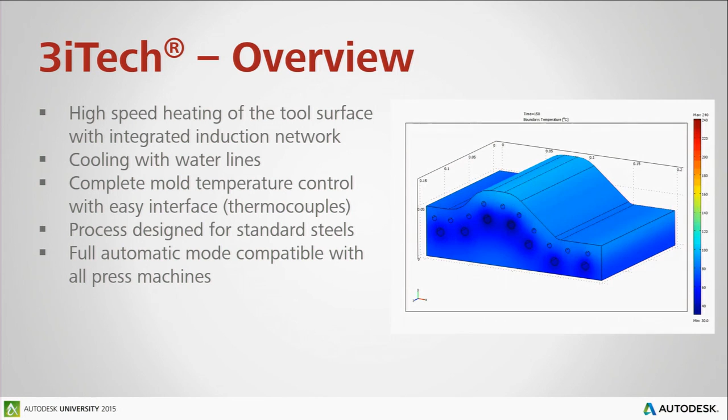If we take a closer look at what happens inside the mold, the idea is to drive a magnetic field within the channel. When that magnetic field is very well driven, very well calculated, we know exactly what's going to happen—how fast we're going to heat the surface, how well we're going to heat it, and what it will take to cool it down.

That is very important, and that's why we're spending time with Autodesk. If we can control this before making a mold, we have a very clear image of what happens in the tool before any serious investment. It's not an empirical approach where we make a tool just to find out if we can make a good part. No—we design an induction network that is relevant and proven, and then we work on the tool design with the tool maker. So we don't heat the surface of the tool directly with the magnetic field; we heat the inner portion of the channel, and then by conduction, we heat the surface.

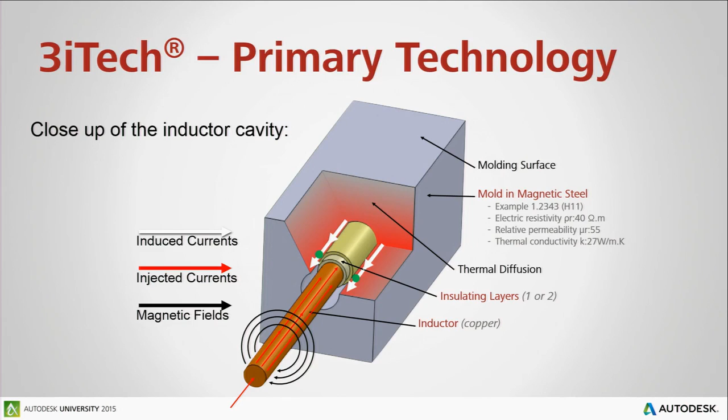I think in the last 15 years, I used to go a lot to Japan in the early 2000s. That's when everything really started, when multiple companies had the steam technologies that was rising at that time. Then I spent some time in Korea with tool makers about electrical heaters and rods and resistance, and also in Germany with pressurized water.

Remember, when you're at home, for those who have induction, you can boil water very, very quickly. Then you remove the pan, you turn it off, and you can put your hand right away on the stove. If you have an electrical resistance, you can't touch that right away, you get away a little. Same thing if you have water circulating in a pipe, you can't touch that pipe right away because there's a lot of heat transfer, a lot of conduction going on.

The other very important thing is, and I think that is why I hope Autodesk picked Roctool, is there's no temperature limitation. So the resin providers right now are very aggressive in building new recipes that cover so many different applications, even applications that used to be painted and now they're not. Sometime we will have maybe a scratch-resistant resin, and maybe that scratch-resistant resin will need 250C in the tool to get to the ultimate surface quality.

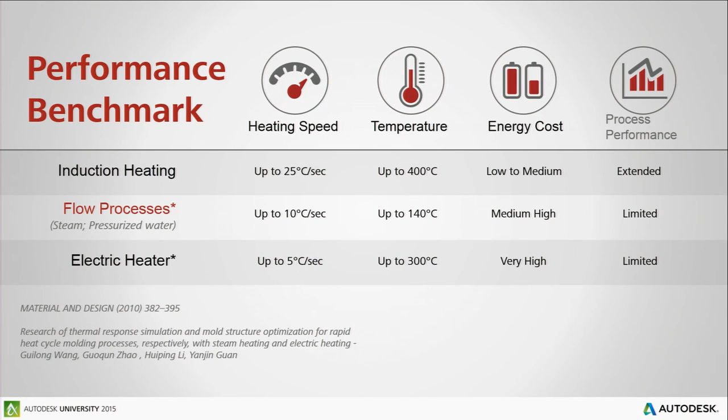That may be the most important slide before Hanno. Clearly, he has the good stuff. But the last 5 years, we've been busy. All our engineers and doctors and all the people at Roctool that make it happen, instead of spending time on the tools themselves, we spend time on the tools to make the molds.

How can we predict the heating? All the way from the heating pattern and the cooling pattern. How do we design a tool that becomes very, very fast? Because out there, a 5 seconds penalty for some companies is a very big deal. So how can we heat the mold when the press is open? As we demold parts, already we're done with the heating for the next cycle.

So all of this is done with those 3 steps where we can simulate the magnetic field based on a design. Let's say you come up with a door panel for automotive, a coffee machine, or a smartphone, we can have a quick look at what's going on. Then we apply a thermal analysis. Based on those results, we find out what's the heating pattern, is there a hot spot, or is it not heated enough here?

And we position our inductors the right way. And when we're done with that, we have a very secured image of what's going to happen in reality. And it correlates. When I was talking to a gentleman, I had no clue he was there for that trial.

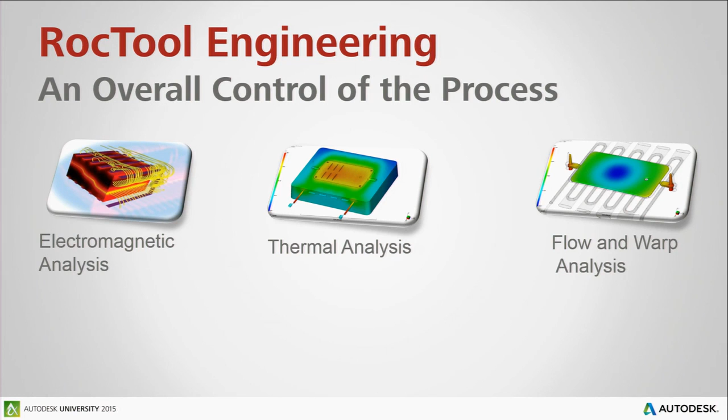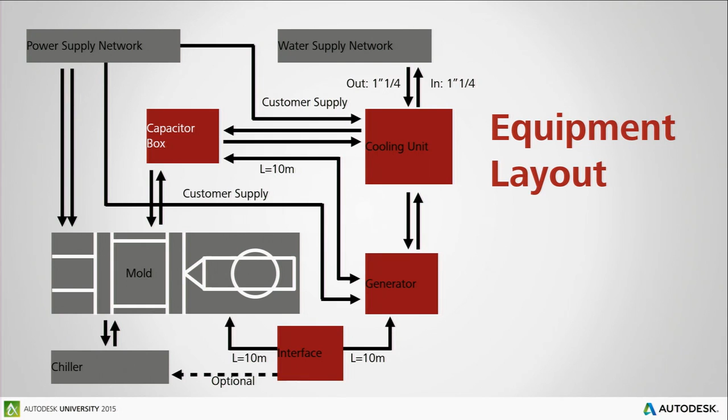Now we released the double zone generators, which is very interesting for those who have challenges with warpage. We're able to control the heat of the core and the cavity at different temperatures and also different speed. So it's one unit with two heads, and this way, for some challenging parts, you're able to balance your temperature in the tool and have different temperature controlled on the core and on the cavity. It's also a way to have, on large parts, two networks on the same cavity with not the same temperature on the same side of the tool.

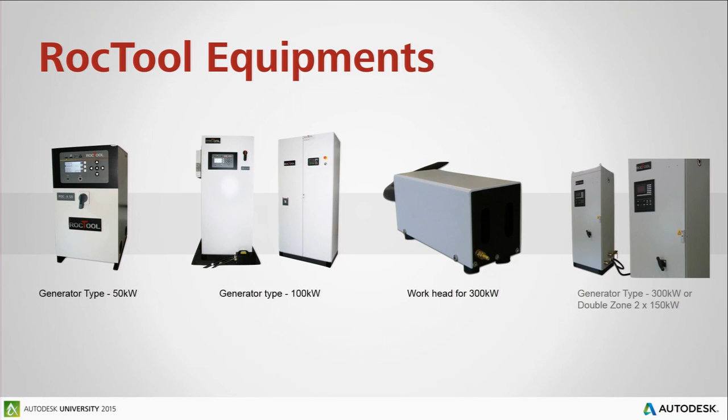So it's all about design, because again, the OEM, at the end of the day, doesn't really care that it's induction heating. I mean, if they like engineering, they may ask, oh, it's interesting, okay. What they want is new design, beautiful parts, light weighting, more performance, cost reduction. So that's our driver. So how do we make it happen?

Well, we need to work at different levels. We need to work on the material and see really, with the high heat, how can we improve the molding for that material that has been selected by the OEM? Thickness of the part, how far can we go? And that's where this collaboration with Autodesk is going to allow us to push the limits and predict more and more challenging designs.

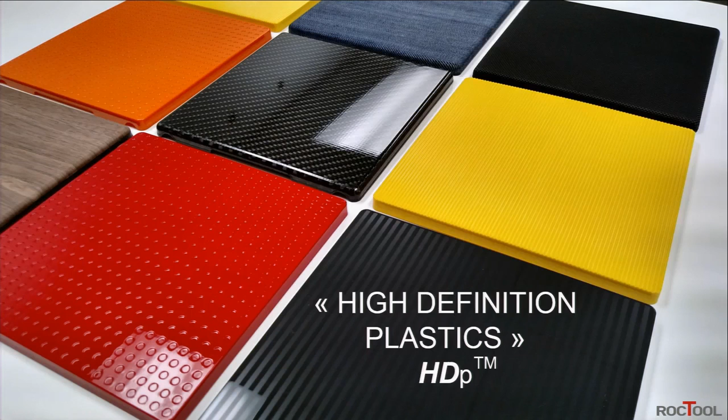So, beginning of 2016, we're releasing a very large campaign. We hired a few people for that. We really hope Autodesk will be part of that. We know they will be. What we call high-definition plastics.

The high-definition plastics is really applying what we know every day around us. When we watch TV, now we like to watch movies in HD. When we look at our smartphone, whatever we do, high definition is becoming part of our life. However, in plastic, sometimes it's okay to see a weld line for some manufacturers. It's okay to have sink marks. It's okay to accept those defects for years and years that we've been having.

Well, we say no more. So we release high-definition plastics that will gather the best materials, the best heat-cool technique from Roctool, the best software capability, so that we have something robust that we can offer to the OEM with the ultimate plastic part. That's our ambition. And beginning of 2016, stay tuned, because we will release more and more results about our achievements.

Those are the four main drivers of that HDp. Number one is to create unique aesthetic directly from the molding without secondary operation. So unique aesthetic means unique texture, high gloss, low gloss combination, patterns, anything that creates a unique part and allows the brand to differentiate itself from another brand and creating their own brand recognition.

So let's remind ourselves about some of the old advantages that we did digest already for quite a few years, but we're past that because it's so obvious. But clearly, we get rid of weld lines. Weld lines are still there, it's just that we don't see them anymore. Two flows of material getting hot in a tool, instead of getting in contact, they cross each other, the eye doesn't pick it up anymore, they become stronger and it's better looking. So we have many projects right now that are using the technology just for that advantage.

However, we think that was just the tip of the iceberg. We're now looking at more and more advantages to push the limits of plastic processing.

A lot of parts, if we look inside a car, you have trim with high gloss, low gloss, texture, metal, piano black. Each design team comes up with their own identity about what they want to show. But if each part has to be individually decorated, then cost goes up, and the designer gets frustrated because purchasing comes back and says, can't do that, that's too expensive.

Got to find a different way of doing it. So if you control the temperature in your mold, you will replicate whatever is on your tool surface. So you can create solutions where it feels like different parts, but it's just different patterns in the tool that create this effect.

If you look at this bezel right here, a very low gloss surrounding on the air vent, the inner portion low gloss, and then the ring of high gloss, it looks like there's another part snapped on as a ring, but it's not. It's just the whole part itself. That differentiation of texture creates unique design solutions.

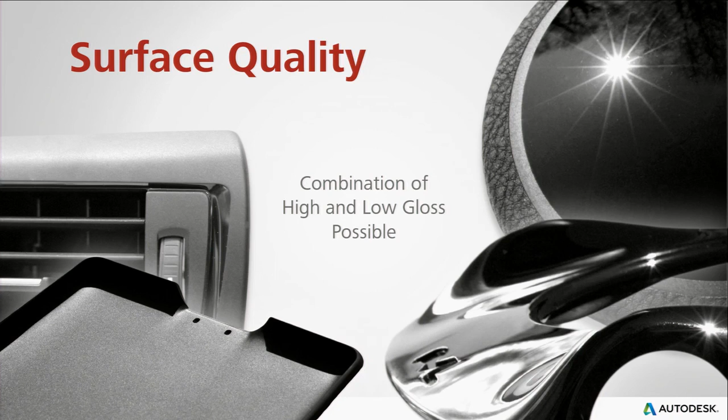The sink mark has always been a challenge, and we don't say we get rid of all sink marks, because we would be a crook. In plastic processing, we know how difficult sink marks can be. However, if you know high heat during injection, you can hold packing, and most of the time you'll be able to overcome or reduce them.

That is nice, because there's a lot of parts where sometimes we don't make the right choice about the rib ratio. Then we end up with a part, show it to our customers, and they say no, that doesn't fly. So if you have a little help at that time, high heat molding is clearly a way to overcome some of them.

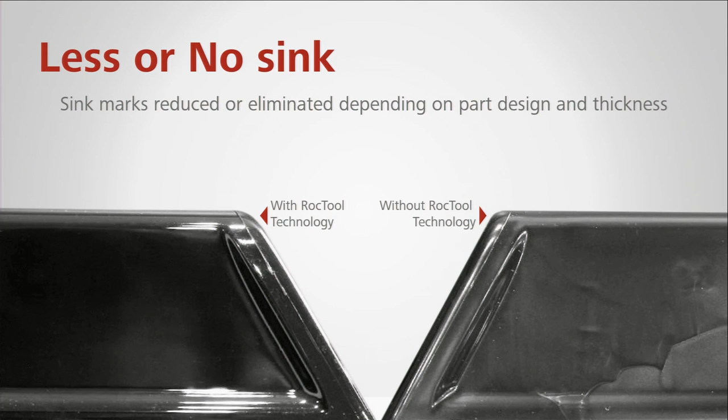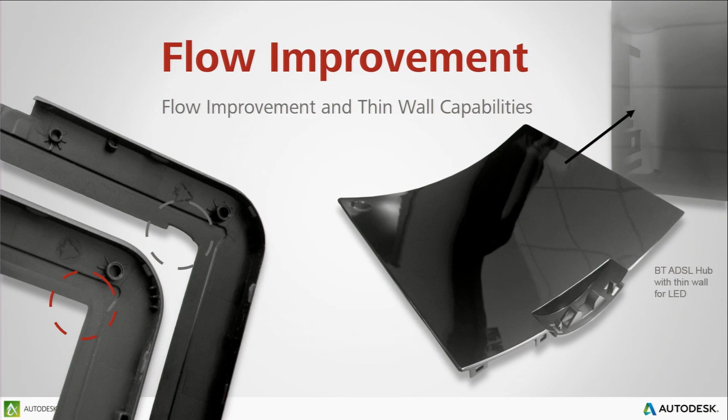It's also a flow improvement. As you understand, temperature is key to improve injection molding. We did a lot of work, for instance, with SABIC. We were able to demonstrate on key resins that from one gate conventionally, we had a flow improvement of 10 to 20% with the same material, same tool, just turning on the temperature. This is very important. As you can imagine in electronics, with those very challenging thicknesses, having this ability is a serious advantage.

This is our vision about what we call high definition, the evolution of plastic parts. We know, and we're all here because we believe in this, injection molding is number one for design functionality. In 30 seconds, you can have a part that's ready to go that can be snapped to do something, versus compression molding or others that cannot have all the back features. So we know it's a very strong process.

It's also great for productivity. It's so quick, all the way to cosmetics, electronics, automotive. If we add induction heat, we add the advantages we just talked about: top surface quality, reduction or elimination of defects, thinner wall, and also pushing the limits, reaching materials that are very viscous and very difficult to handle that now become possible.

That also opens up what we call surface-oriented resins. If we know that with induction heat we get rid of secondary operations, then the resin provider comes back in the game and says, I've got to work on solutions for scratch resistance, chemical resistance, because the part is as is—there's no more cover-up. So we do a lot of work with resin providers on color, particles, durability, chemical resistance, and also additional features like feel, cold touch. We think this is just the beginning.

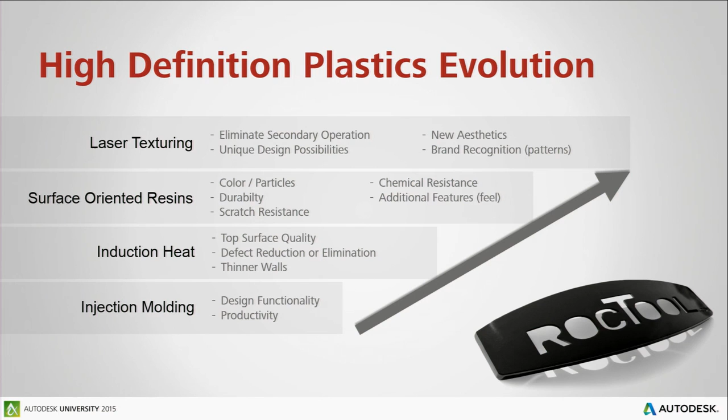This is just a quick case to demonstrate the replication on the tool surface. So if you take a Ra value on your tool texture, or VDI that we use in Europe, here it's a 22 value, and conventionally on that polycarbonate that is molded at about 180 F, the replication of the texture is about 17 on the part. So that gives you an idea.

And then this little square here is a 19 to 24, 22 to 27, from the same tool, just turning the induction on right before injection for about 3 seconds, we ramp up to 320 F. That replication ramps up to 21, as you remember was 22. But look, as you go to finer textures, 23, 24, 26 to 27, it's almost 100% replication of your tool surface. What happens is visually, the part stands out. Right away, it looks very nice, very premium. But it's the same tool, same material. There was no addition of any tricks whatsoever. It's just using the temperature.

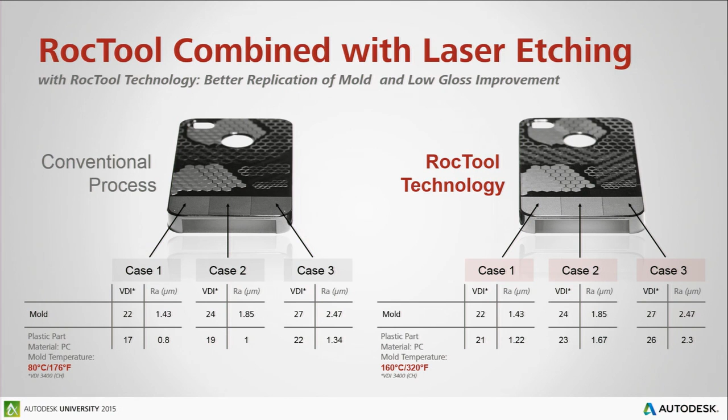I just brought a part here. I didn't bring many parts, but this one is relevant to the level of quality you can reach with laser texturing. I'll circulate it. So that's an ABS. Yes, ABS, I know it's hard to believe. The gate is right here in the middle, so we get rid of the blush. There's never a blush with induction because the material close to the gate stays warm. And this is just what's textured in the tool.

Show this? So whoever had French fries, you might want to hold the part from underneath so that the last person can see a nice part. Can I show these? Yeah.

Those are also another example of a texture. So just to explain, there's a part without. It's in French, in the back it says 'sans', so without. And we push the limits to include directly a hologram on the tool surface. Conventionally you almost don't pick them up, but when you turn on the induction, that turns them on, and you can see them like some kind of image. That's interesting for maybe some applications for protecting the application itself, making sure that it's not a direct copy from the mold. And the interesting thing I find is if you put your finger over it, you can barely feel anything. It's amazing.

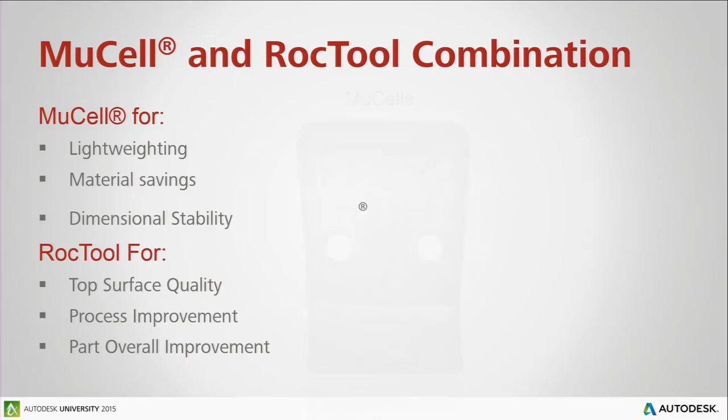So while we circulate those few samples, last but not least, I think we have a lot of work with Autodesk to continue developing this technology. And I know you already spent time on the MuCell. Yep, so that's great, there's potentially synergy here.

But whenever you mix plastic with something else, let's say you have a fiber reinforced resin, short fiber or long fiber, that can be glass or carbon, or a blowing agent or talc or any filler, during that process, when you conventionally mold, the resin and that filler are mixed up and they freeze right away, so they show on the surface. But if you're able to drive the temperature right before injection, the resin at all times, whatever the resin is, will flow much faster, will cover that charge, and have all that filler disappear from the surface.

So that part right here is conventionally molded with the MuCell, where with laser texture details, we have a high gloss zone, a big weld line in the middle, a little square of super thin wall, less than 1 millimeter here, and then low gloss on the top and bottom. You can see the mess, because all that MuCell, like little bubbles of gas mixed up with the resin, gets on the part, and this is it. It would be the same thing with fiber.

And then as we turn on the temperature, we bury it a little bit like a sandwich structure, and then you only have that nice PC-ABS on the surface that reveals all the details. You can see here, we had almost like a holographic decoration of a sitting position. It was just a part we made for NPE. But what's funny is it doesn't even show like it wasn't there. So I think it's a very nice example of how far you can go controlling the temperature in your tool.

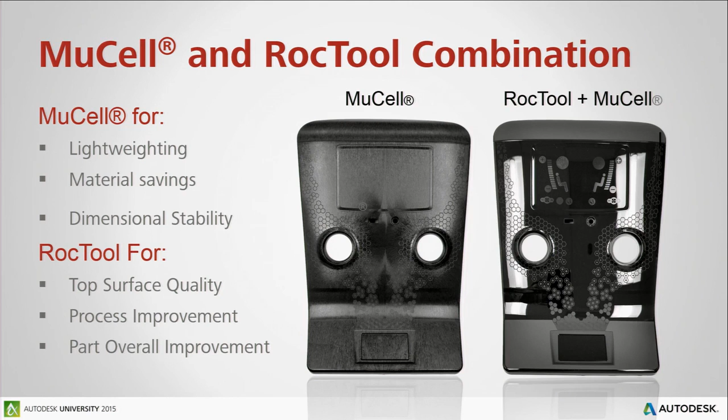Yeah, we have a pretty good product, I think. We worked really hard on it, and we developed it from scratch and built it in a fairly short amount of time.

All right, so the tool we took for the validation is like a similar cell phone type of cover. I'm not entirely sure what it is, but it's injected from two sides. We have a PC Makrolon used there, and some grainy textures on the surface.

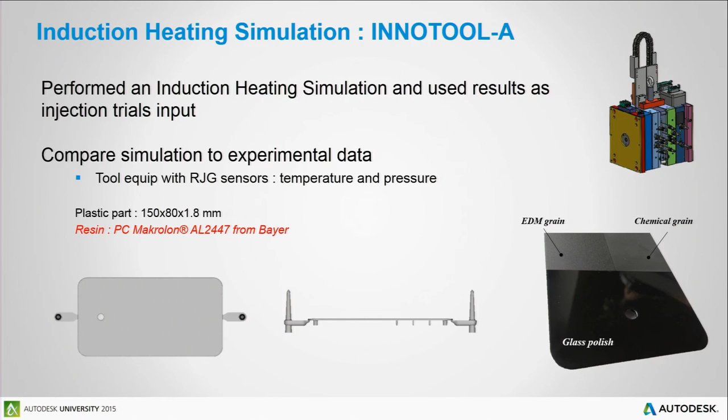We have instrumented a couple of sensors. There's a couple of pressure sensors built in, and a temperature sensor in the middle over here that we have some data from. And over here somewhere, we have a thermocouple to control the Roctool switching on and off.

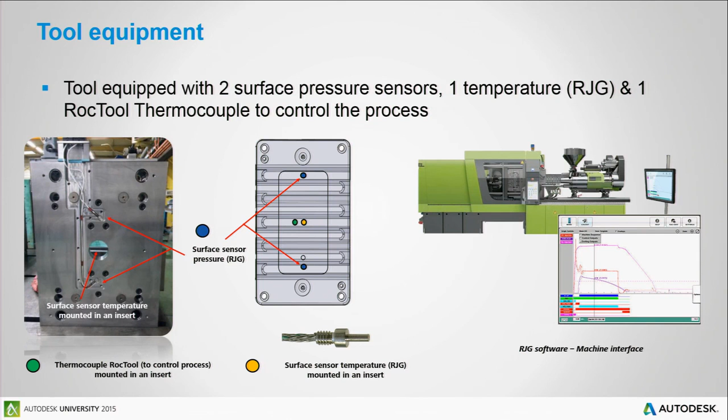So we're running on an Engel, and we can grab some graphs from the machine as well there.

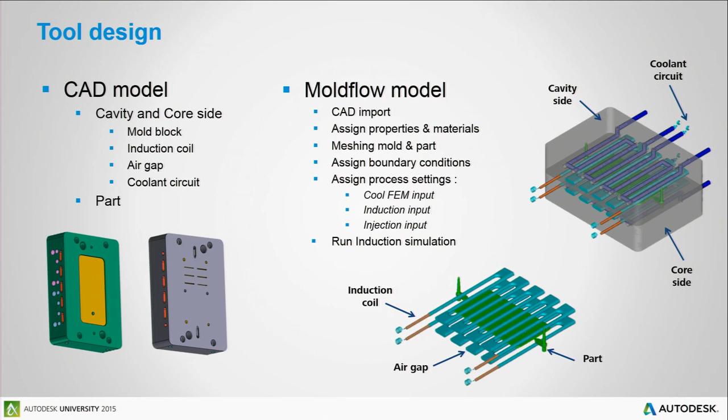The tool, I'm not going to go into too much detail, but there's a couple of components that we have to point out and model separately, and bring it into Moldflow. I'll go through this in a bit more detail in the next slide, and build it up a little bit.

So the first thing we need is a part, fairly obvious. The second thing we're adding is a set of induction coils. This is not the exact model that we use for the validation, this is the model we use for the NPE demo, but it was pretty good to illustrate which components have to be modeled.

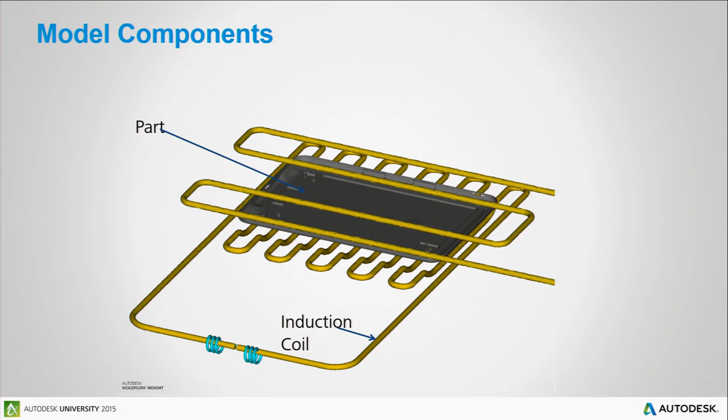So in this case, we have two different induction coils on the top and the bottom half of the mold. We have to model an air gap around the induction coils, and the air gap, my understanding, is it helps to concentrate the heat on the surface there. So it's a pretty important component of the design.

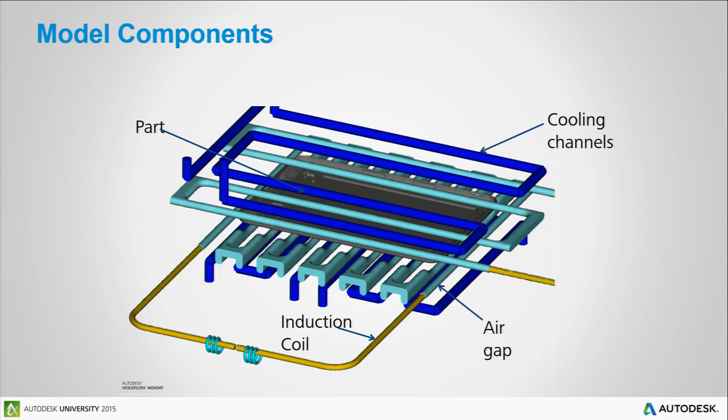Then after we heat up the mold, we obviously have to take the heat out, so we model cooling channels behind the induction coils. Build our mold or insert around it, like you can actually build a bigger tool around it even. And I think we're set.

So in terms of the components, we just went through it, but the modeling itself actually requires a bit of attention, because a lot of the heating happens very close to the surface of the mesh. So we need a good amount of definition, a good amount of elements near the surface. We actually put some effort into understanding how fine we can build a mesh.

The heat gets dumped on the skin, so we have what we call the skin effect, and we have to understand that skin layer, skin size. We can calculate that, and we can use it to drive our mesh size.

Another important piece that actually drives the normal mesh thickness is that when we mesh the molds, we have to create a couple of extra layers very close to the skin, called enhancement layers. By default this is set to 3. As soon as you have induction coils in the mold, this set of enhancement layers becomes an option in the mold meshing.

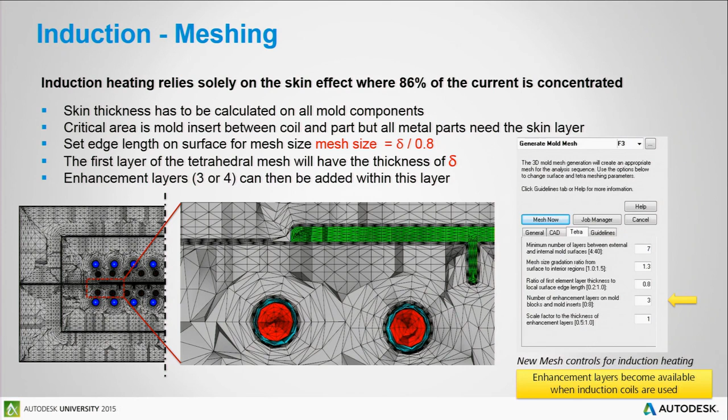Then we give the properties to the tool and describe the cycle, the process settings. We have to define properly which components are made out of copper, which are steel, and what kind of steel, because different steels will actually have a different magnetic effect. We have to key in information about the magnetic properties of the material, because as mold flow we never had the need for that before. So there's information we have to provide into the analysis to understand how the different metals respond to an electric current.

To describe the process, one thing you'll notice later is if you animate the temperature distribution over time in the mold, at the beginning, what we normally start with is injection already at temperature, and you actually start seeing sometimes already a bit of a drop off in temperature. So the ramping up of temperature actually starts before the shot starts. It looks a bit odd in the analysis here and there, but it actually is correct. We have to properly model or specify how the induction actually happens when you start the induction before the start of injection.

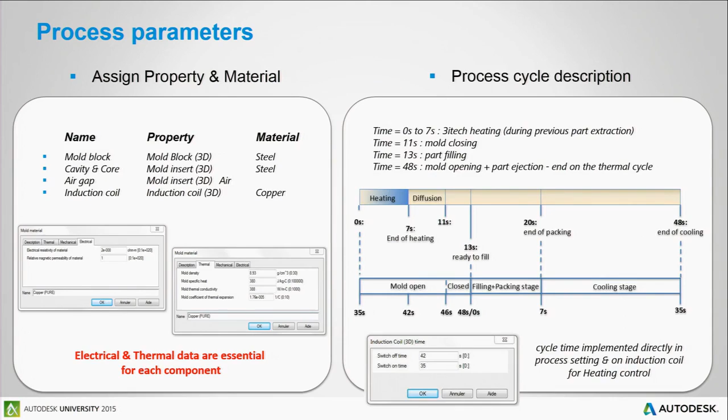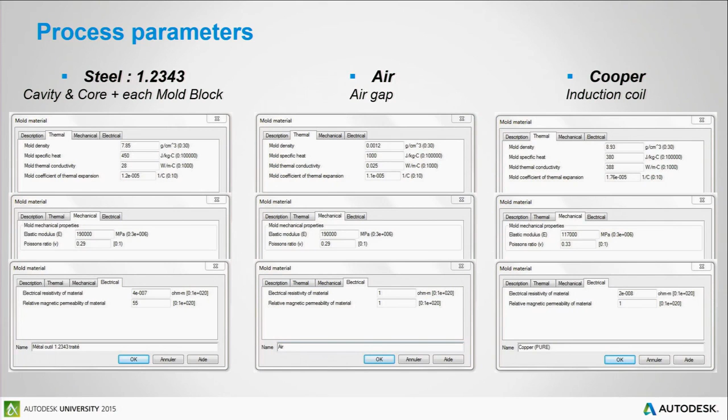Then we have to give proper properties. The air has to be modeled. This is one of the occasions where we actually give properties of air to the steel, to the tet mesh, and model copper, or add copper to it, for the induction coils. Then we specify the inlets for the induction coil, like where the conductivity goes in and when it comes out, and specify currents and frequency. That's very important, that will basically drive the amount of heat that's being dumped on the skin. Important controls. And specify your boundary conditions for your cooling channels, and then you're off to the races.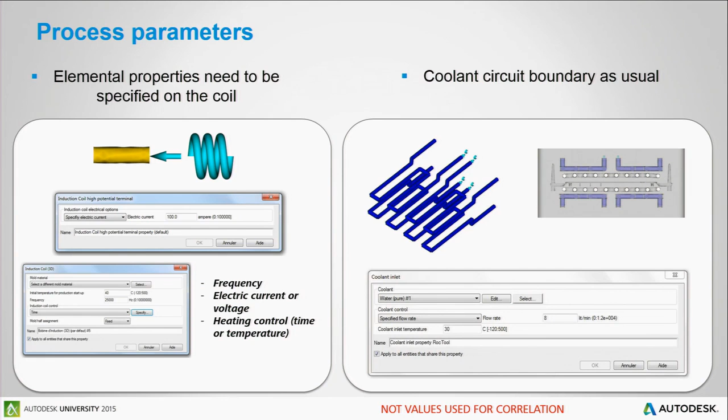So what happens at that point is basically we start the induction analysis. We understand how much temperature is being dumped on the surface. That goes into our cooling analysis, and we also have to extract heat, obviously, so there's a good amount of calculation involved here. We typically get the best results from induction heating from startup, so it will take a bit of time to get to that point. But there's a number of specific results that are related to the electromagnetic results.

So the current density, joule heat, magnetic flux density, the source current density, and the source electric potential, and there's some other results on real parts and imaginary parts, and it's pretty obscure. But at the end of the day, those type of things you're typically not going to use as a Moldflow user.

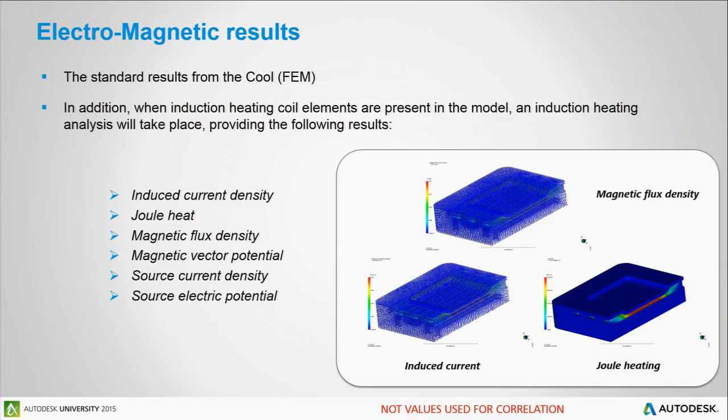What we're probably going to be looking more for is how the temperature cycles through the cycle. So what you'll see is that before the next injection starts, the mold is already at high temperature. Where your part is over here, we actually bring the temperature up really quickly. At the end of a cycle, you will see that part being very blue, and then really quickly it ramps up to the process temperature. That's actually one of the key elements of induction heating - it's just flash heating where you need it.

And then you see the second bump up coming again. That's partially because of the plastic actually going into the mold, giving the second bump in temperature real quick.

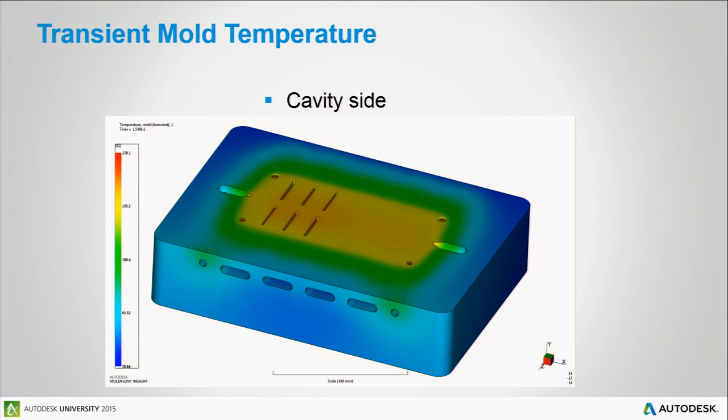We can also look at the temperature of the part surface. We're still looking at the mold surface right now, but just at the skin layer that's touching the part. The results I'm displaying over here are actually not the exact result that I got 20 minutes ago, or like an hour ago. I was able to get the previous animation in, and this one I just didn't have time to finish, but it's pretty close.

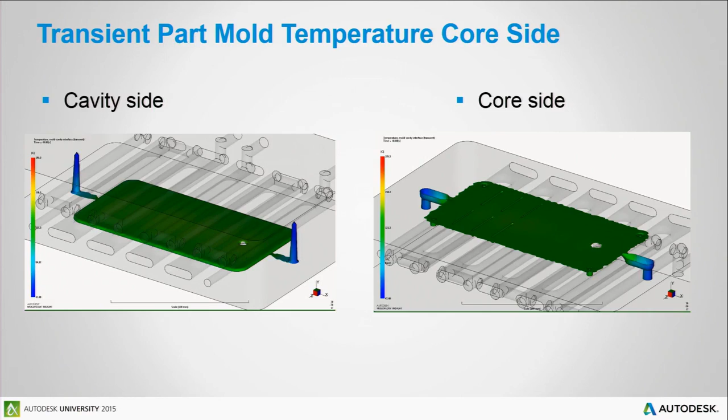And obviously we can extend the whole thing to a warp analysis, so we can actually understand, like Matt said, how the part deforms as a result of the injection molding cycle, as well as taking into account the temperature cycling. So it's a pretty flat part, and we're excited about that, obviously.

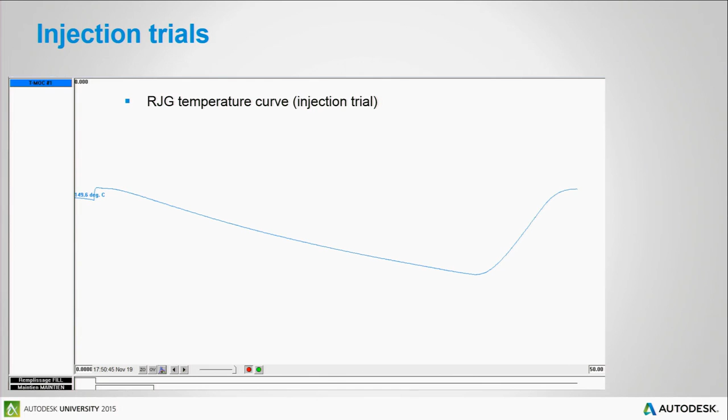We can also do the same process on a machine and actually extract a bunch of data from the machine itself and from the inductor. This is the experimental data, and unfortunately I have another graph coming up that you will have to look at alongside the graph I'm presenting later - that's the Moldflow results. But you see, at the start of injection over here, the mold is at temperature, and it cools down, then really quickly ramps up to production temperature towards the end of the cycle, ready for the next shot, obviously.

So the point of this presentation is that high definition plastics opens up a lot of possibilities for designers to actually be really creative in how they design or market their products.

If you look at cell phones, a lot of them are just the same piano black. If you give this a pattern, all of a sudden it becomes a competitive advantage. It looks cooler than the just straight piano black. Even if you make a piano black really cool, it's obviously nice, but it opens up new possibilities for people to differentiate themselves, and we want to be part of that.

Obviously there's a lot of complexity involved, and before you start cutting steel, you want to really know how this is going to work. So this is why we're partnering up to do simulation before we build a mold, because once the thing is there, we're dealing with it. It helps us validate whether this is feasible technology before you start cutting steel.

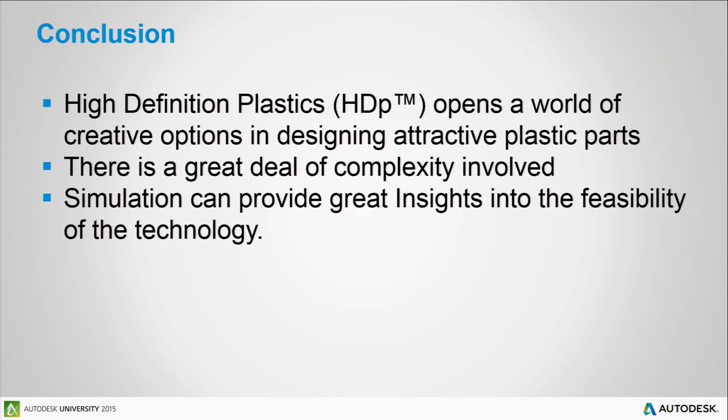Before we say goodbye, I want to acknowledge a lot of hard work that our team members have done on our side. In France, Guillaume worked really hard with Stefan to put this together and get this data set ready. And on our side, we have Clinton in Australia who's been really instrumental in this work.

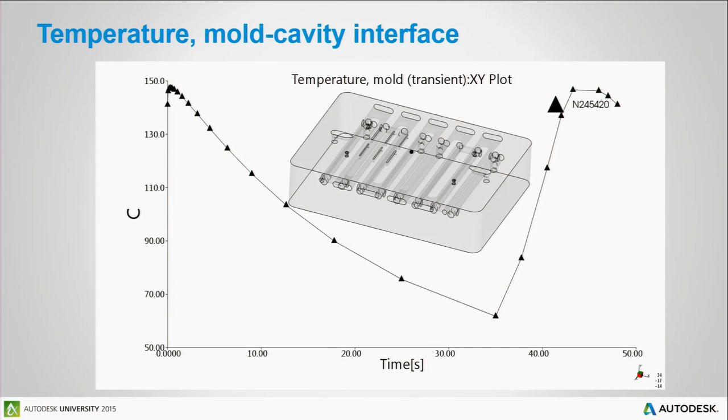Versus the other heat cool methods, where it's very difficult for them to control in a consistent way, because at some point conduction keeps going, and then you get to stop production because everything is hot. Thank you very much. Sure.

Sir? Thanks for the presentation, it was interesting. I just have one question.

You mentioned, answering the other question, that you're heating up just a really small portion of the mold. Isn't it a problem during the mold's life cycle that you heat it up and cool it down really fast, and you have high temperature differences in the cycle?

No, it's actually better for the tool. We need to look at what we're doing today. Today you have a material that is preheated to 650°F, that you drop on a cold surface. So you have about a 580°F delta on steel.

So you can use plastic to heat steel today—that's what's happening. What we do is we just raise the temperature before the resin comes in, to ease it. Actually, why do we have a drop in pressure requirements? Because it's easier to mold.

So we have the same tool life. There's no cracks. We have about 300 molds in production today, and none of them have a crack.

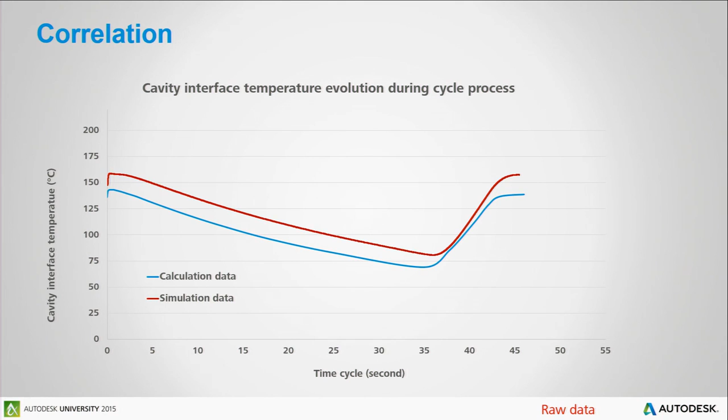Nobody else? Oh, that's enough. It's beer time? All right, thank you.